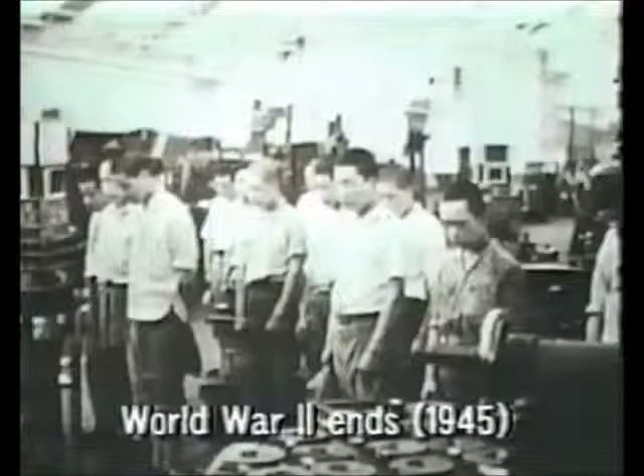After the war, Kiichiro passed on his dream to his cousin Eiji. He instructed Eiji to bring the company up to U.S. standards of technology within 3 years.

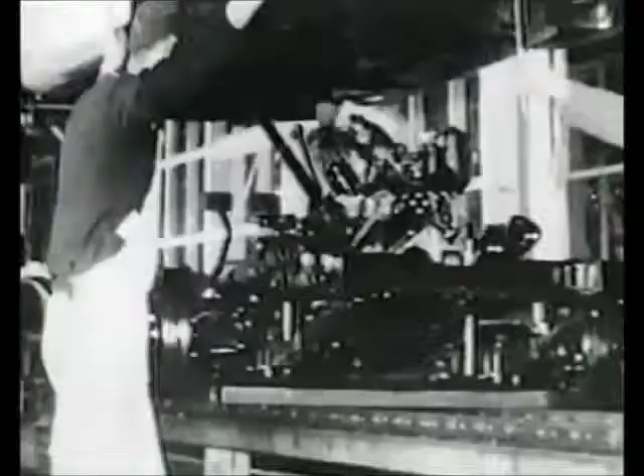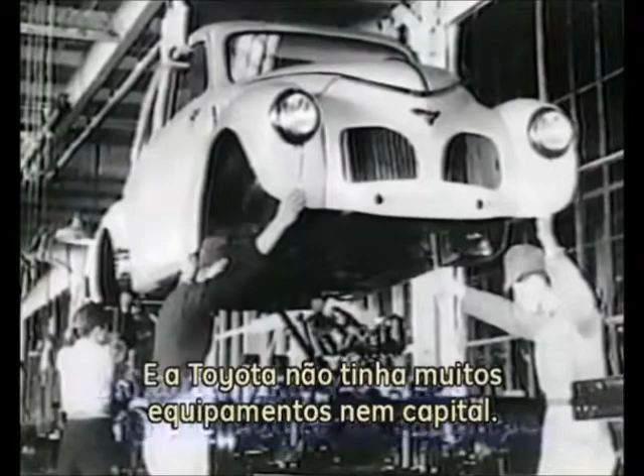That was a daunting task. U.S. productivity in automobile manufacturing was 8 times higher than Japan's, and Toyota was short of equipment and capital. So raising productivity was a pressing issue. Eiji assigned a machine shop manager by the name of Taiichi Ohno to develop a more efficient production system.

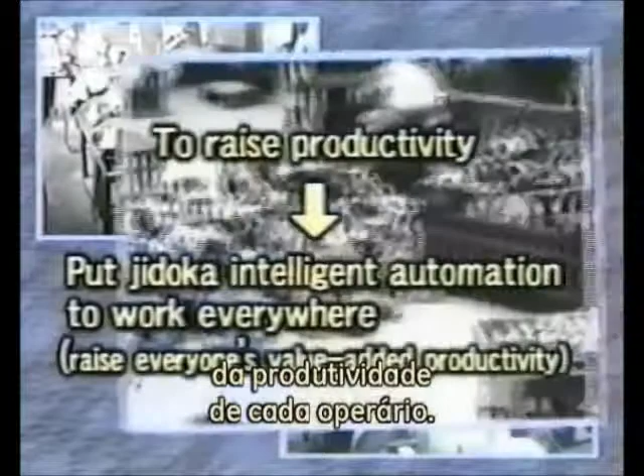The two men looked for ways to raise the value-added productivity of every worker. They did that by putting Sakichi's Jidoka concept to work throughout their operations. They also looked for other ways to stretch their limited resources of equipment and capital, by putting Kiichiro's just-in-time concept to work systematically.

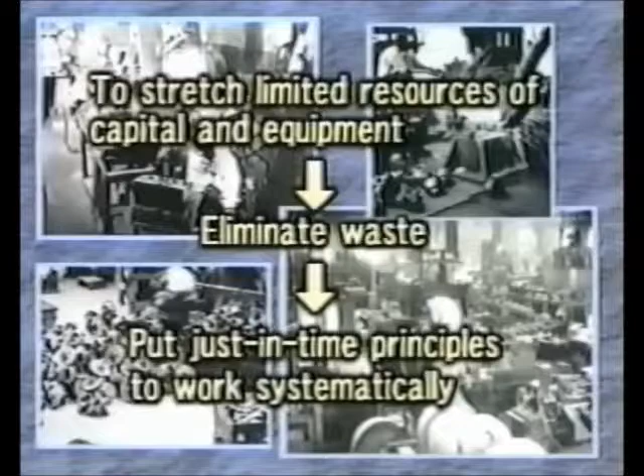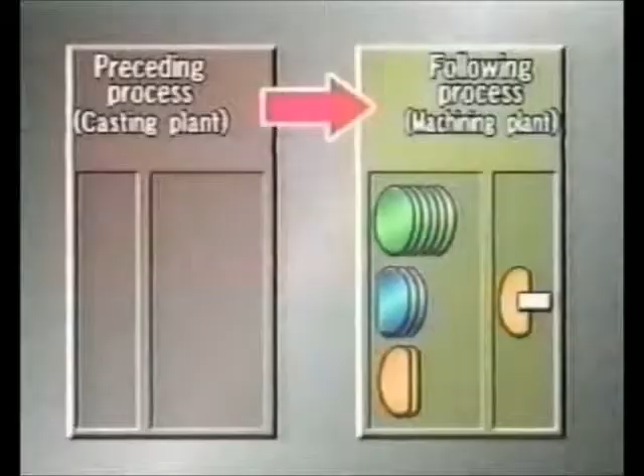Ohno took a cue from the U.S. supermarket. He made each process the customer for the preceding process. In traditional manufacturing, processes delivered parts to the following processes regardless of what was actually needed.

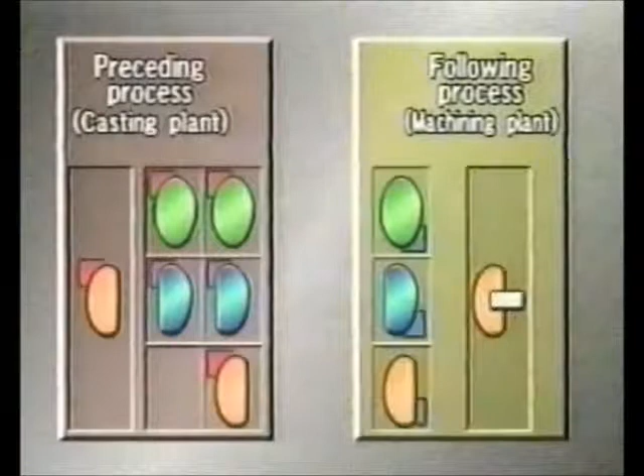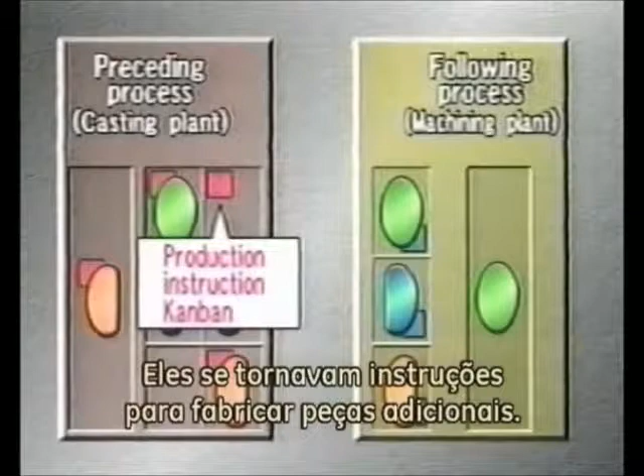Ohno devised a completely new kind of system. Processes used Kanban cards removed from parts they had consumed to withdraw parts from the preceding processes. Kanban on the parts arrayed by processes came off when the following processes withdrew the parts. They became instructions to make additional parts. The Kanban flow ensured that processes made parts only to replace parts actually consumed by the following processes.

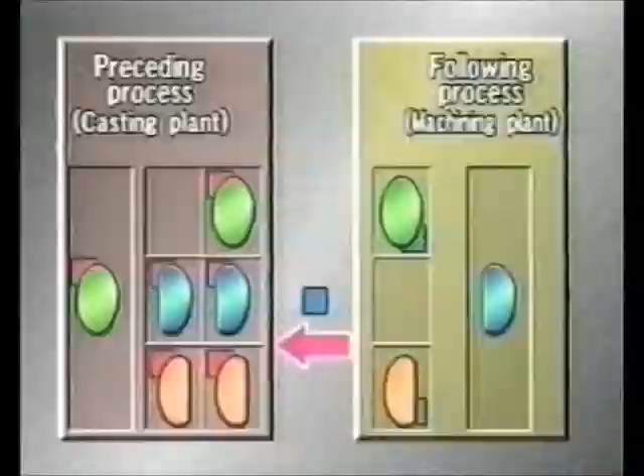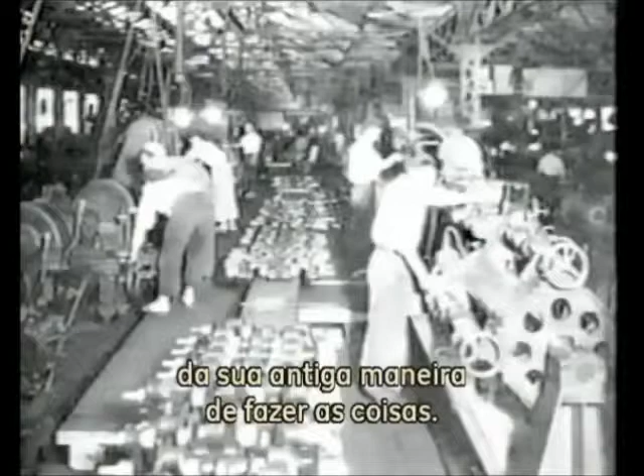Active cooperation by the people in the workplace would be essential to Ohno's system. But at first, people were reluctant to give up their old ways of doing things. Ohno took the initiative. He went into the workplace and taught people how to use his system.

Eiji Toyota supported Ohno enthusiastically in putting the new production system in place. A new production system gradually took shape on the foundation of just-in-time manufacturing and Jidoka intelligent automation. As the Toyota production system, it became a standard for manufacturing industries.

The Toyota production system gained global attention after the oil crisis of 1973. Toyota recovered more quickly than other automakers from the crisis, and its production system received much of the credit for that resilience.

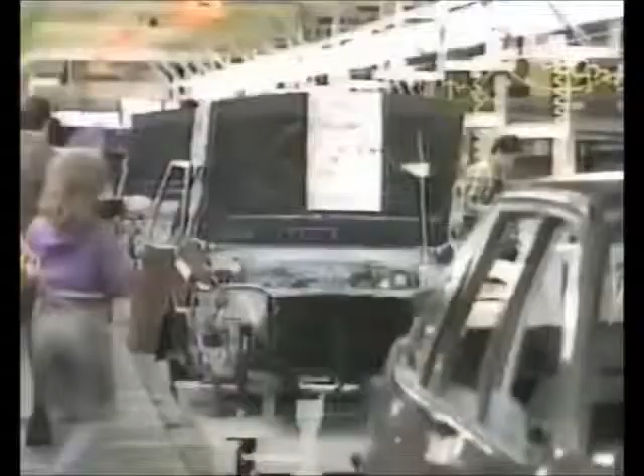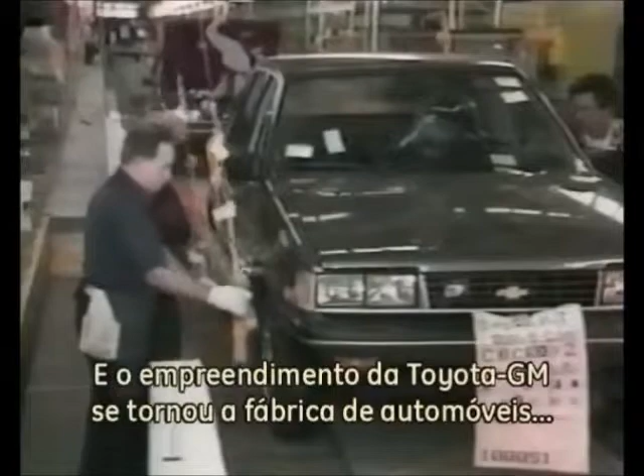General Motors Corporation approached Toyota about setting up a joint venture to make small cars in the United States. The two companies set up New United Motor Manufacturing Incorporated in California in 1984. Differences in language and culture presented big challenges, but the spirit of making things well knows no borders. People accepted the Toyota production system, and the Toyota-GM joint venture became the highest-ranked automobile plant in the United States for quality.

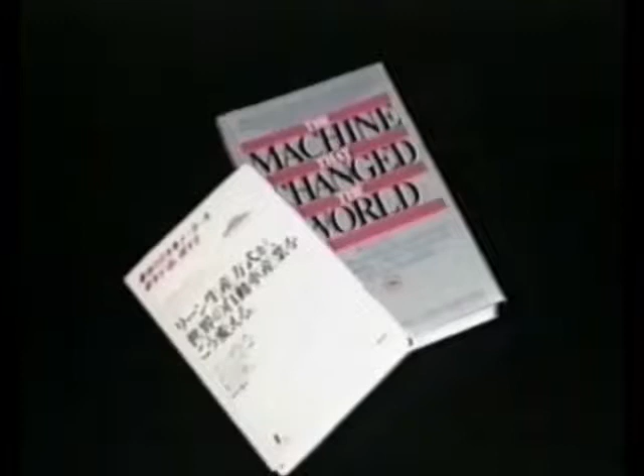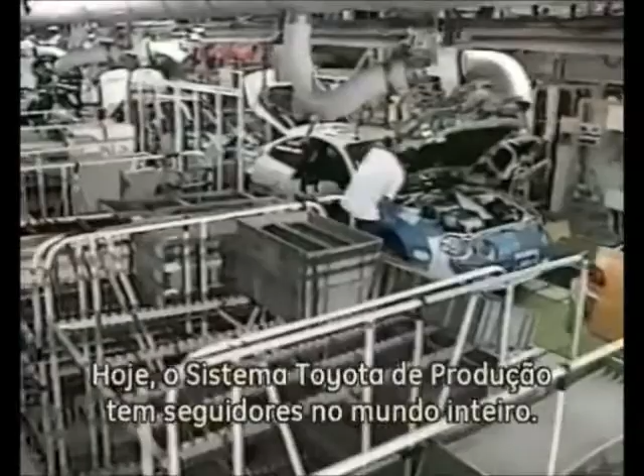It became a symbol of successful industrial cooperation between Japan and the United States. A book published by the Massachusetts Institute of Technology hailed the Toyota production system as the machine that changed the world. Today, the Toyota production system has gained a worldwide following. Let's see how the system now operates in the world's most modern automobile plants.

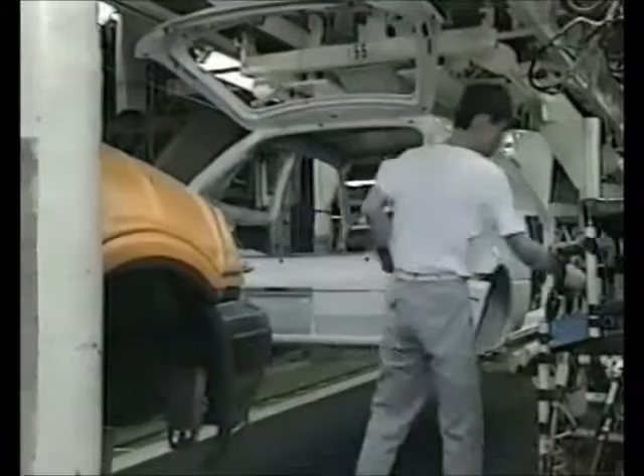The trucks that deliver parts to the plants carry a variety of items in each load. That allows each truck to travel fully loaded, which minimizes trips and thus reduces traffic congestion. Forklifts carry the parts unloaded from the delivery trucks to racks alongside the assembly lines.

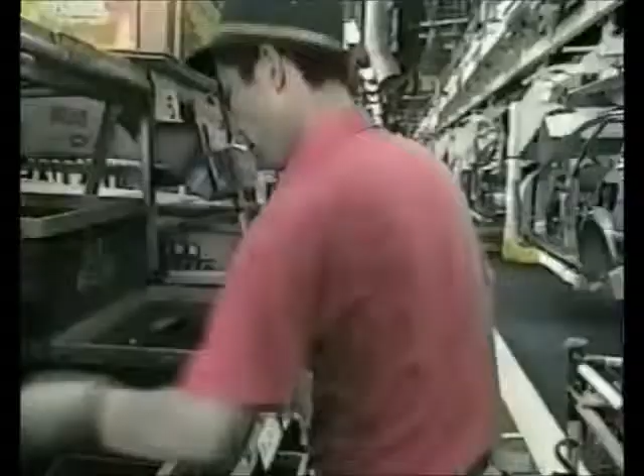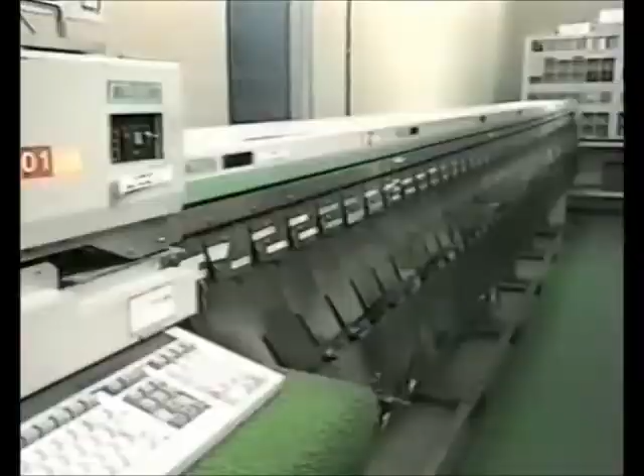When people on the assembly line use the parts, they remove the attached Kanban cards. The Kanban get picked up regularly and sorted. The delivery truck drivers pick up the Kanban for their company or companies before leaving. Back at the supplier's plants, the Kanban become orders for withdrawing additional parts.

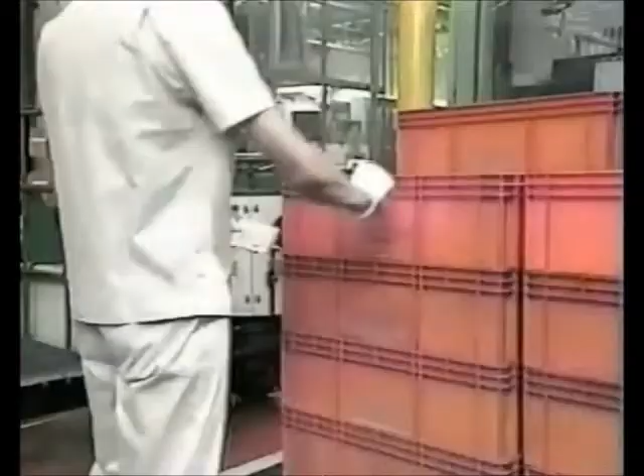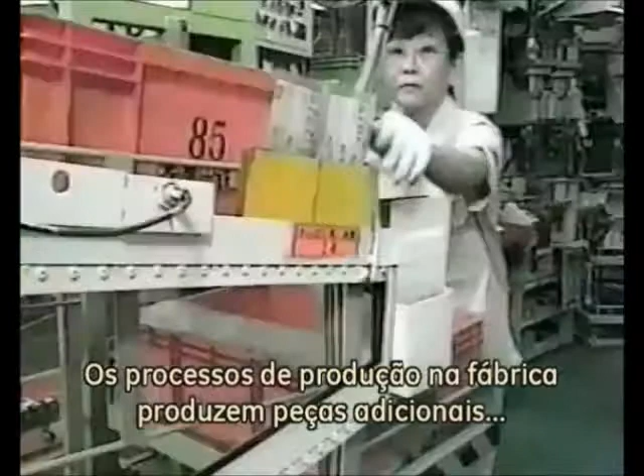Sorting arranges the Kanban according to area in the plant. Shipping personnel exchange the Kanban and empty boxes for full boxes. The production processes in the plant make additional parts only to replace parts that have been withdrawn. That prevents the wasteful buildup of inventories.

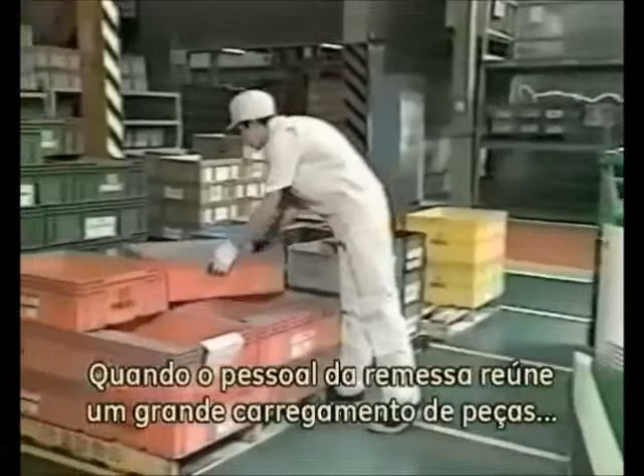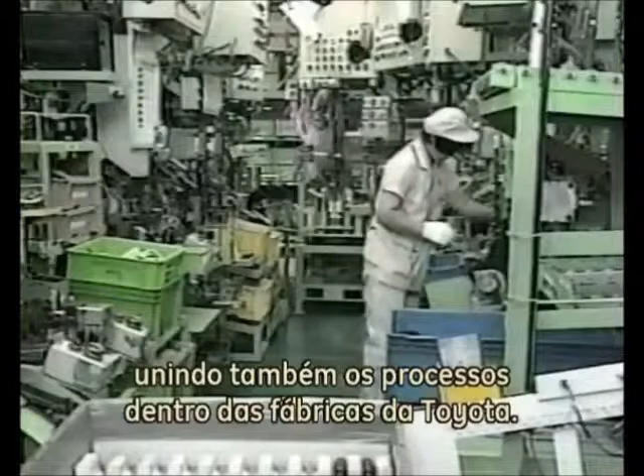When the shipping personnel have gathered a full truckload of parts, a truck carries the parts to the vehicle plant. Kanban thus link Toyota plants with suppliers' plants, as well as linking the processes inside the Toyota plants. Just-in-time manufacturing minimizes inventories, eliminates waste, and maximizes productivity at all the plants that participate in the Toyota production system.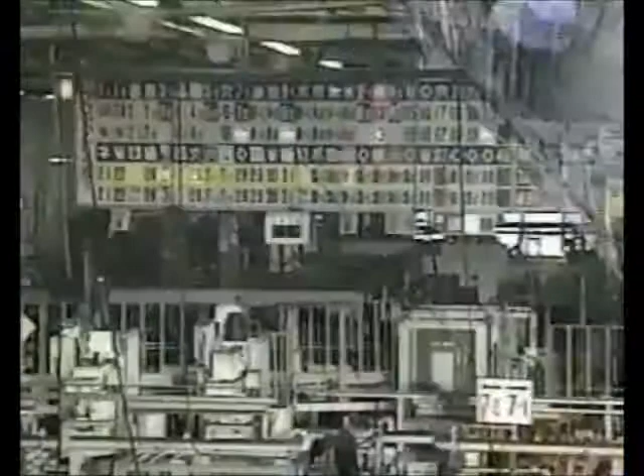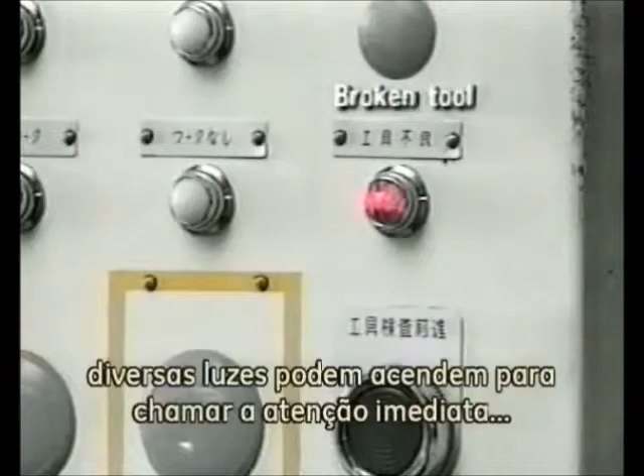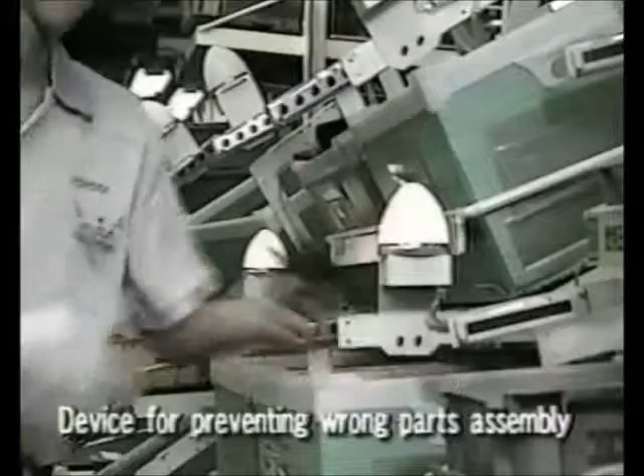Jidoka Intelligent Automation also continues to play a big role in the system. On automated machining lines, numerous lamps light up to call attention immediately to any problems detected by sensors. On assembly lines, the employees themselves have devised countless Jidoka measures to prevent defective work. So Sakichi's concept continues to prevent waste. The idea is to build quality assurance into every process, and it works.

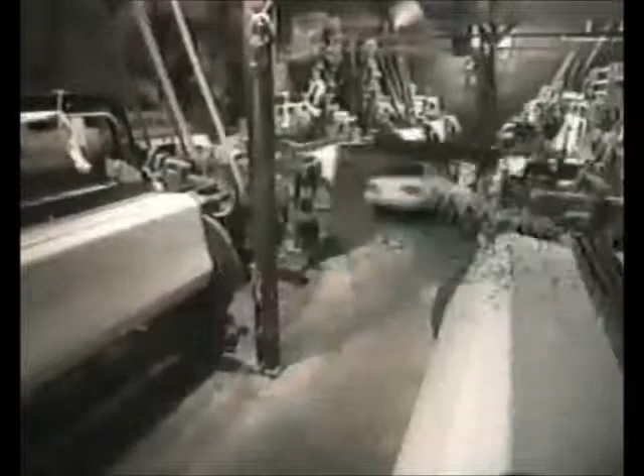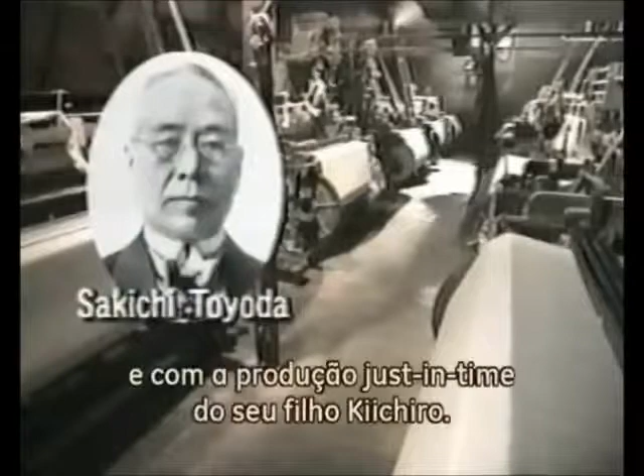The foundation for the Toyota production system has been established by Sakichi's Jidoka Intelligent Automation and his son Kiichiro's just-in-time manufacturing. Taiichi Ohno and others put those concepts to work systematically with the strong support of Eiji Toyota and his passion for manufacturing.

The Toyota production system continues to evolve in response to changing needs and circumstances, but the fundamental concepts are eternal, including Toyota's commitment to continuing improvement in every phase of products and operations. Those concepts underlie a lasting contribution to enhancing the quality of life for people everywhere.